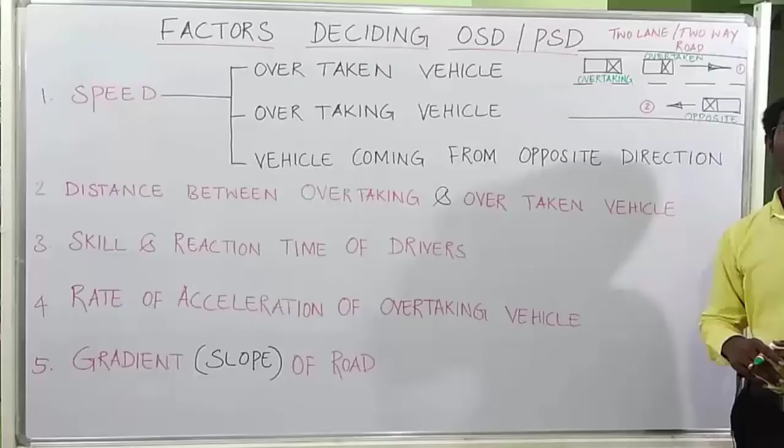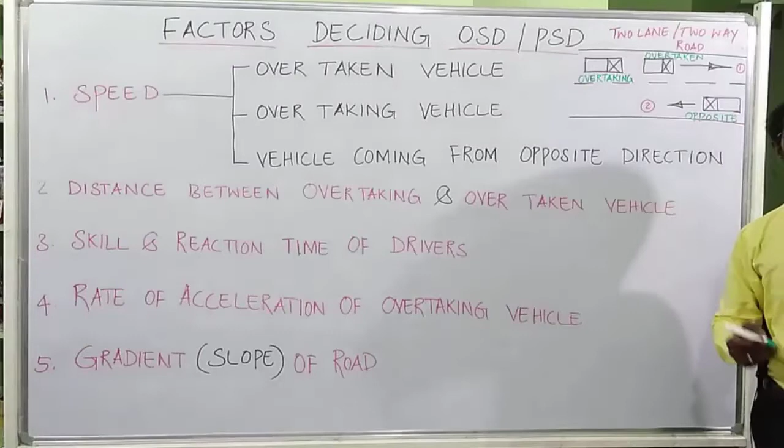Mostly overtaking or passing sight distance will be designed on a two-lane, two-way road. We have already discussed what is two-lane and what is two-way. Two-lane means one lane for one direction, another lane for the other direction. So this is called a two-lane, two-way road. On this road, one vehicle is traveling at uniform speed, and another vehicle is traveling at the design speed. The vehicle traveling at design speed is the overtaking vehicle. The vehicle traveling at uniform speed is called the overtaken vehicle. There is also an opposite direction vehicle.

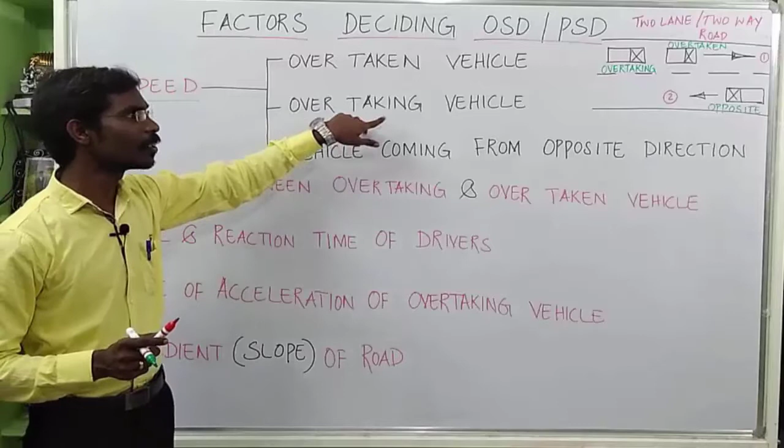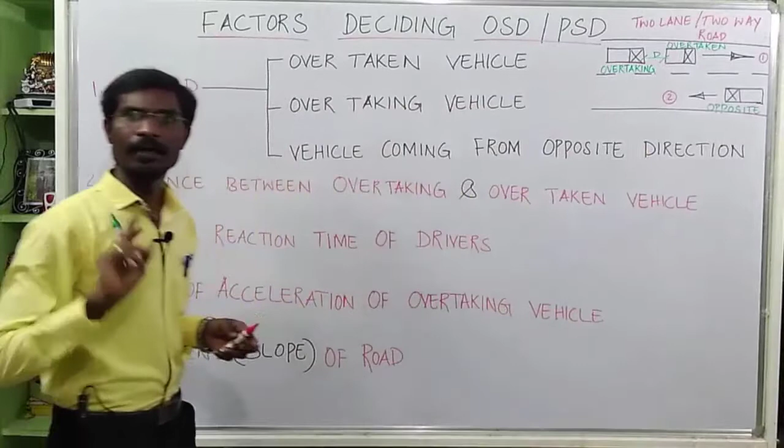The third factor is very important: skill and reaction time of the driver. The reaction time of the driver we discussed in our second video. The skill of the driver is very important because all drivers don't have the same skill. Based on gender, age group or health condition, the skill of the driver may vary, because it is experience. Skill means experience. Reaction time of the driver also varies, because based on experience and perceptiveness, the reaction time may vary from driver to driver.

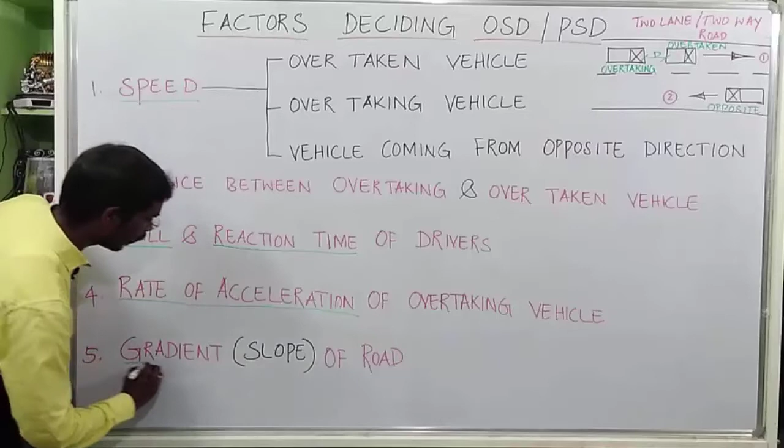The fourth factor is the rate of acceleration of the overtaking vehicle. We need to consider at what rate the overtaking vehicle is going to accelerate. The fifth factor is gradient, or the slope of the road. Based on the condition of the road slope, the overtaking speed may vary.

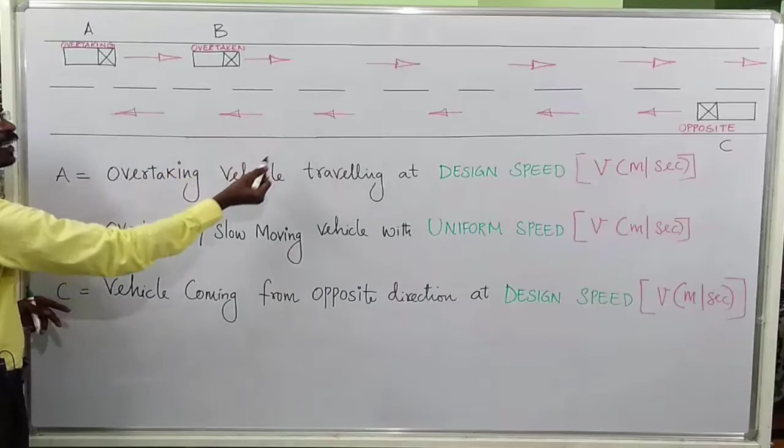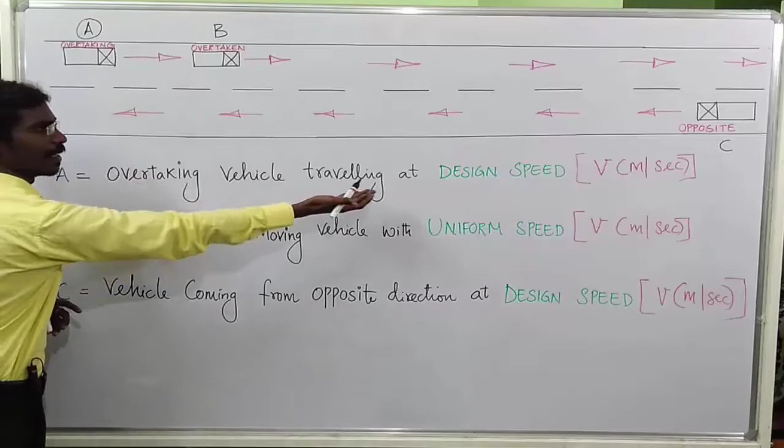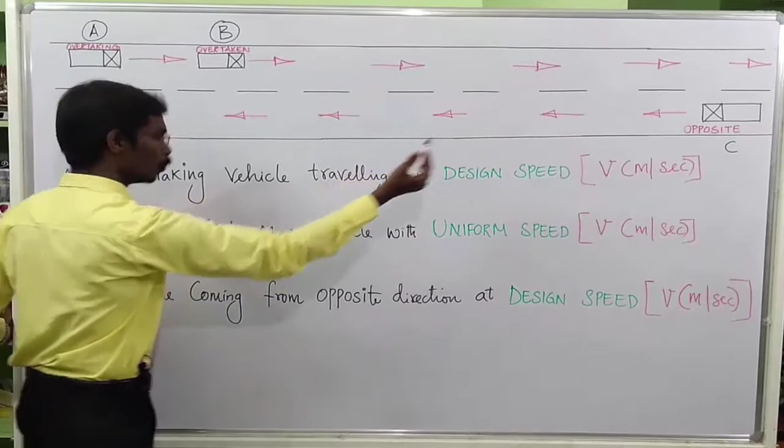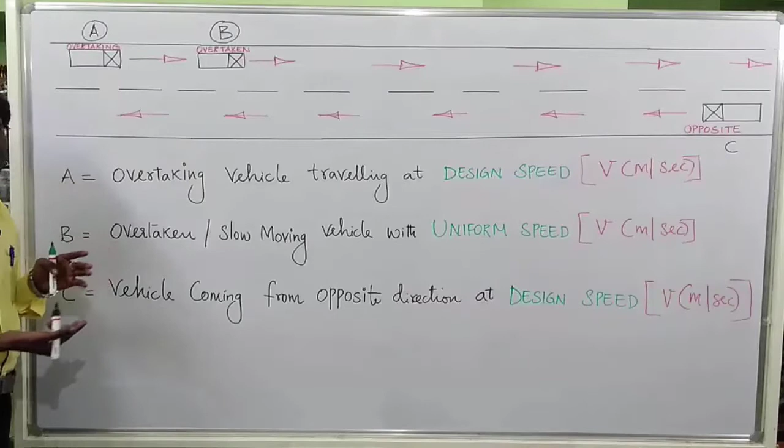This is the actual overtaking sight distance or passing sight distance arrangement on a road. Vehicle A denotes the overtaking vehicle traveling at design speed. Vehicle B denotes the overtaken or slow moving vehicle with uniform speed. Vehicle C denotes the vehicle coming from the opposite direction. These are the three vehicles involved in overtaking sight distance. B is the overtaken or slow moving vehicle, moving slowly with uniform speed. A is the overtaking vehicle moving at design speed, fast compared to the overtaken vehicle

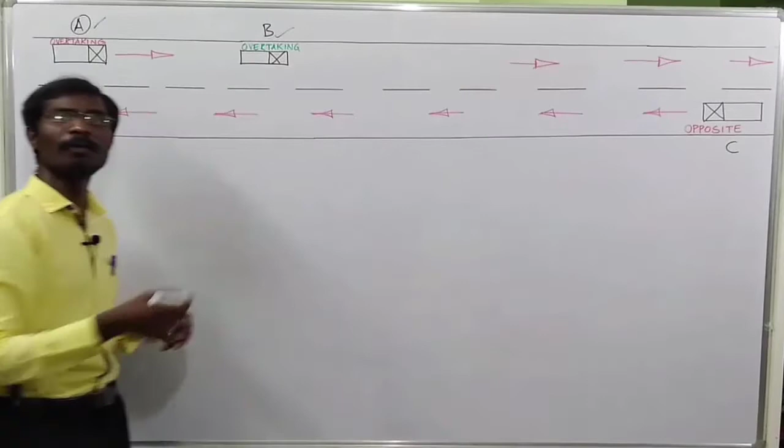or slow moving vehicle. Now the overtaking vehicle driver is thinking to overtake vehicle B. At that time he is thinking about the possibilities of overtaking, whether the distance between the overtaking and overtaken vehicle is available or not, and what is the speed of the opposite vehicle. Like this, he is thinking of many things. This is called the reaction time, which we already discussed in video 2.

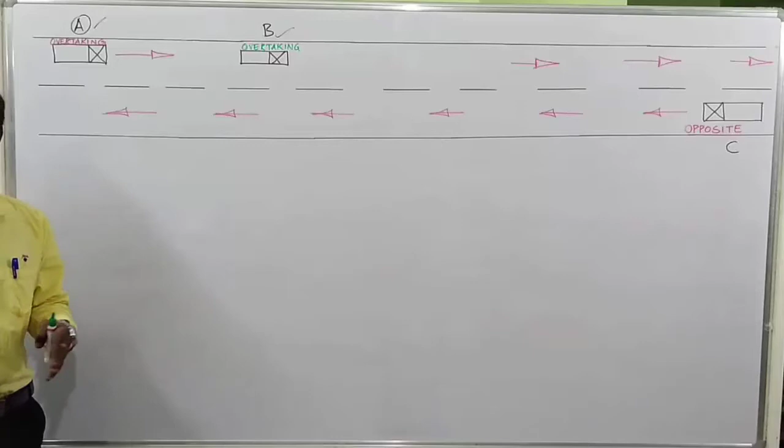The reaction time may be split into 4 parts. One is perception, perceiving the distance or the situation available on the road. The second is intellection: how to overtake, what are the possibilities. Emotion is applying the overtaking action. Volition is the final action of the overtaking. So this is the reaction time of the driver.

During the reaction time of vehicle A, vehicle A may have travelled from this place to some other place. Same like that, during the reaction time of driver A, vehicle B also traveled from this position to some other distance.

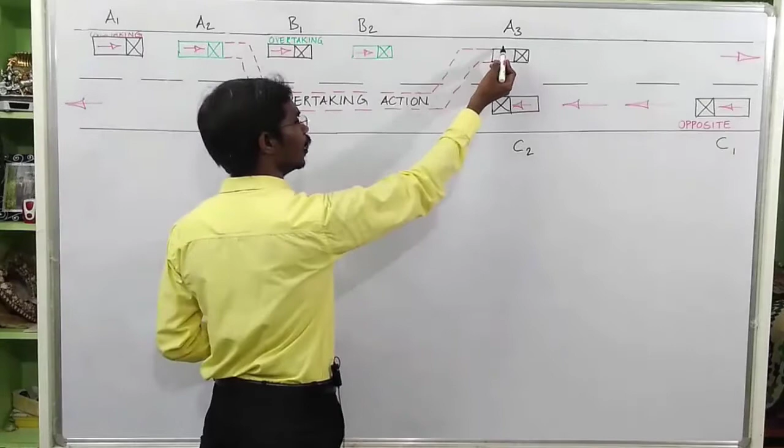During the reaction time of the overtaking vehicle, the vehicle traveled from A1 position to A2 position. Same like that, the overtaken vehicle traveled from B1 position to B2 position. Now the overtaking vehicle traveled from A2 position to A3 position during the actual overtaking time. At the same time, the opposite vehicle traveled from C1 position to C2 position.

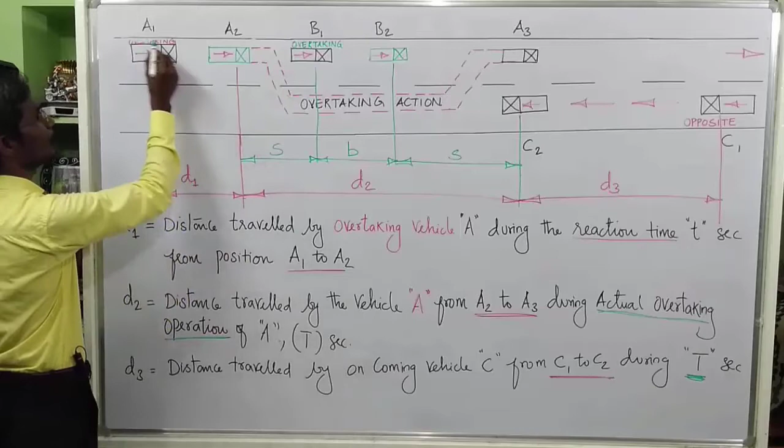Now we can understand what the actual overtaking procedure is. D1 denotes the distance traveled by overtaking vehicle A during the actual reaction time of the driver, that is t seconds, from position A1 to A2. This is called the D1 distance.

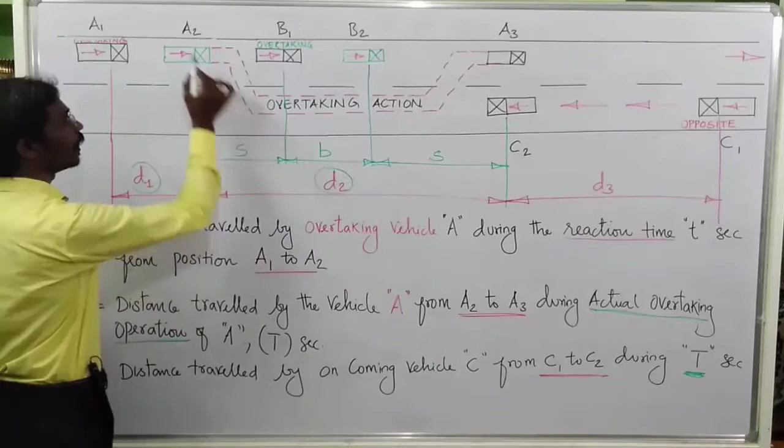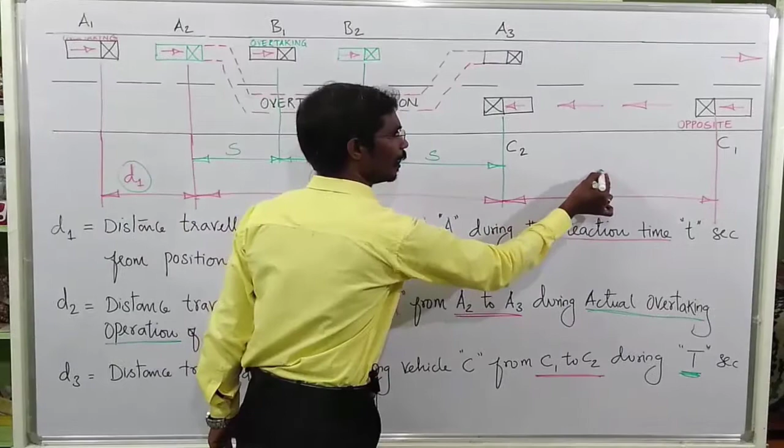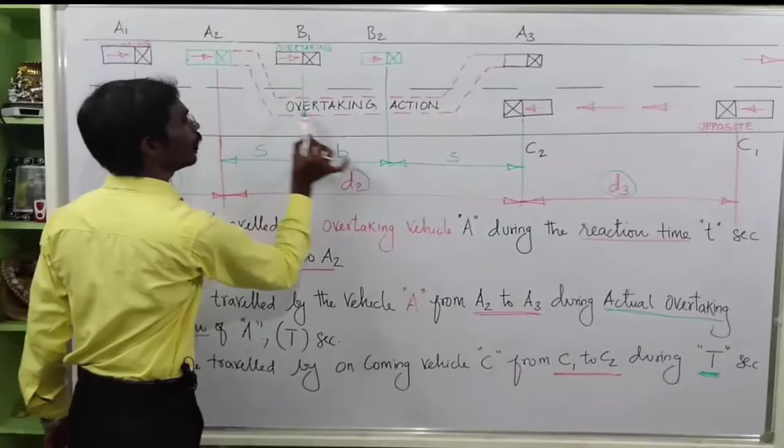The second one, the distance D2, denotes the distance traveled by vehicle A during the actual overtaking time, that is T seconds, from A2 position to A3 position. The third one, D3, denotes the distance traveled by an oncoming vehicle from C1 to C2 position during the actual overtaking operation. Let us discuss the formula to calculate the overtaking sight distance.

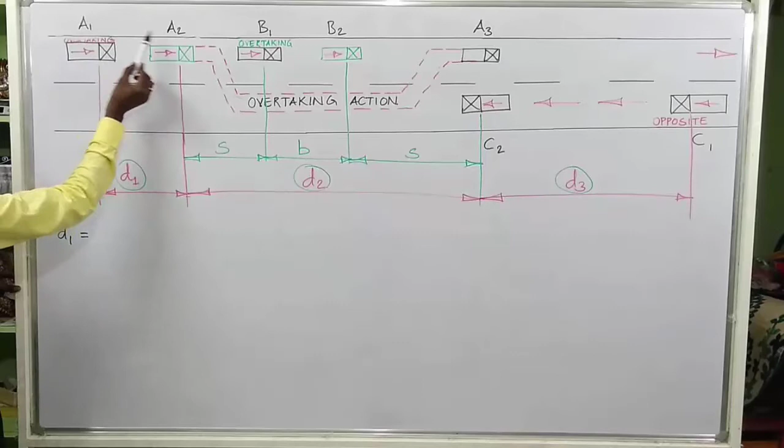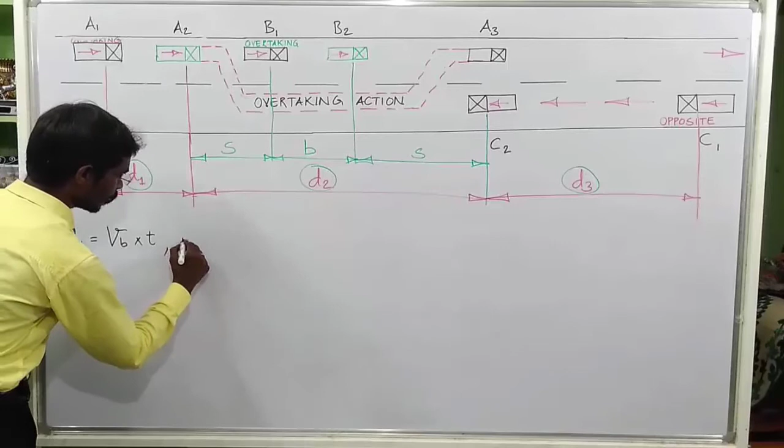First, D1 denotes the distance traveled by the overtaking vehicle during the actual reaction time from A1 to A2 position. So D1 equals vb multiplied by t seconds. vb denotes the velocity of the vehicle. t denotes the reaction time of the driver. The unit is meters because it is a distance. D1, we know, is the distance traveled by the overtaking vehicle from A1 position to A2 position.

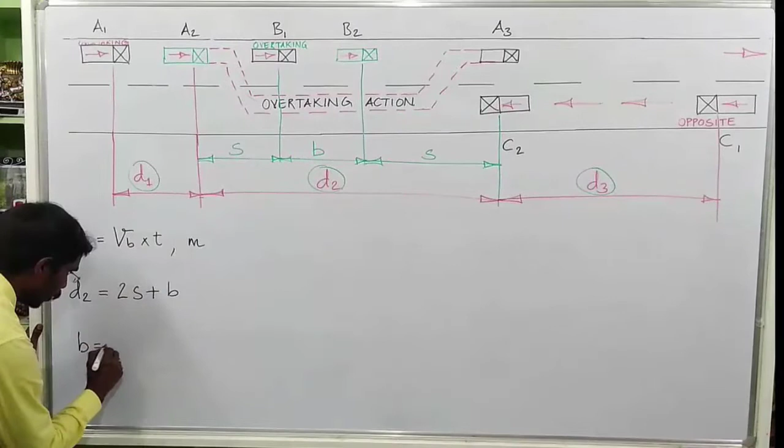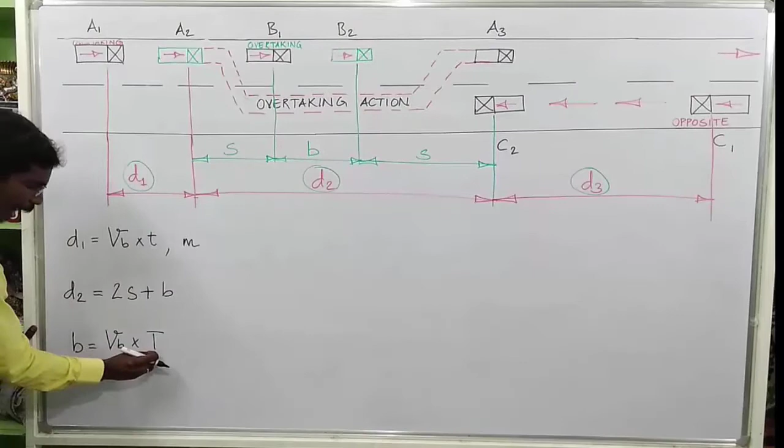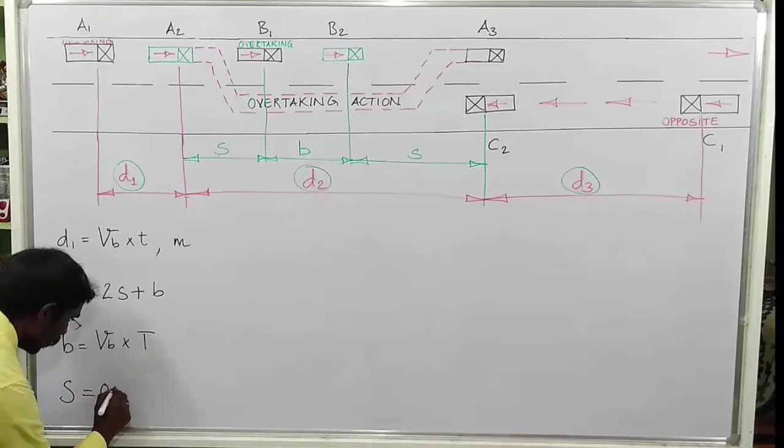Now we can calculate the D2 distance, that is 2 times S plus b, that is 2S plus b. The small b we can calculate: b is equal to small vb into capital T. Again, small vb is the velocity of vehicle B, that is the speed of the vehicle. Capital T denotes the actual overtaking action time. The distance S will be calculated as S equal to 0.7 vb plus 6.

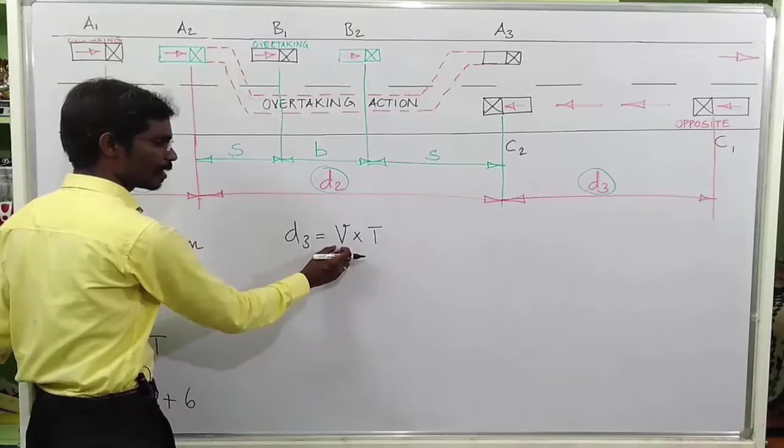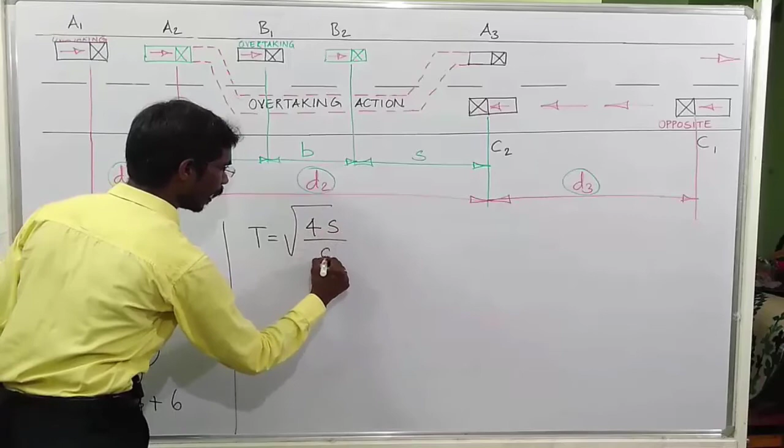The last, D3, can be calculated as D3 equal to V multiplied by capital T. We know V is the design speed, and T is the actual overtaking time. So now calculate capital T, the actual overtaking time. T is equal to the square root of 4 times S divided by A. S we know is the distance here. A means the acceleration of your vehicle.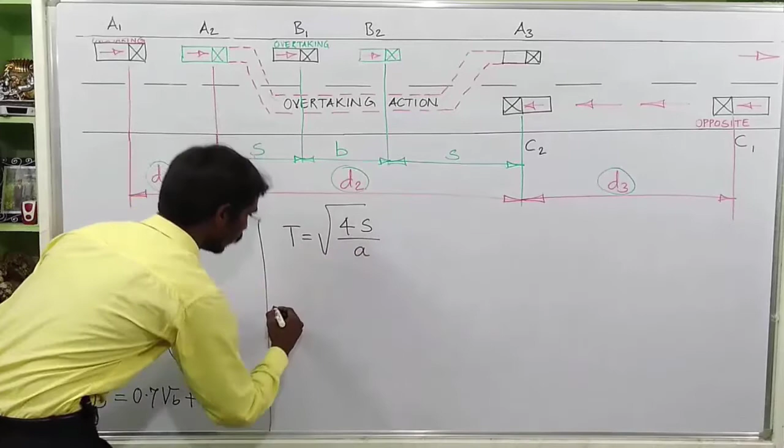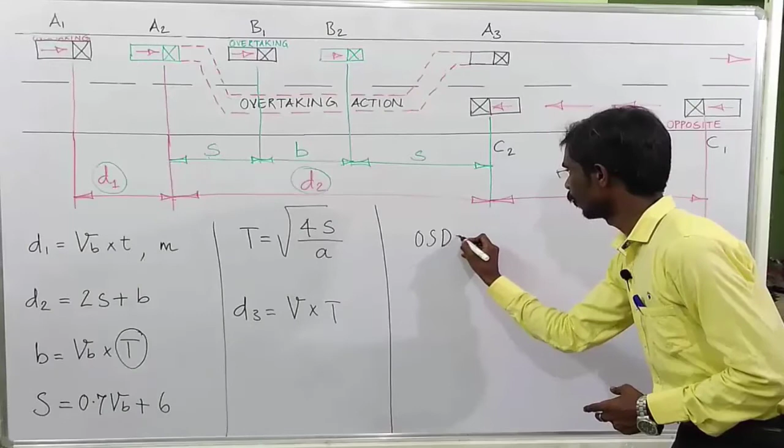Then find D3. D3 equals capital V multiplied by capital T. V denotes the vehicle velocity or vehicle speed. Capital T denotes the overtaking action time. Now we are able to calculate the overtaking sight distance, that is OSD is equal to the summation of D1 plus D2 plus D3. This is called the overtaking sight distance, in meters.

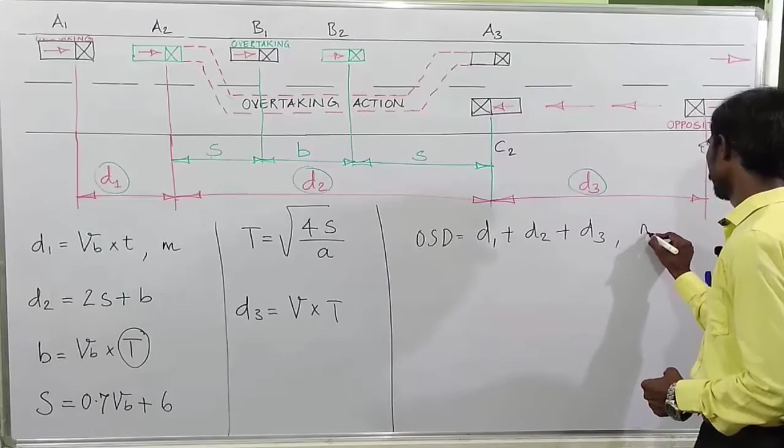After calculating the overtaking sight distance, that is OSD equal to D1 plus D2 plus D3, you can draw the overtaking zone diagram. In this overtaking zone diagram, 3 times OSD is the minimum distance required for the overtaking operation. 5 times OSD is the maximum distance required for the overtaking operation. This zone is called an overtaking zone.

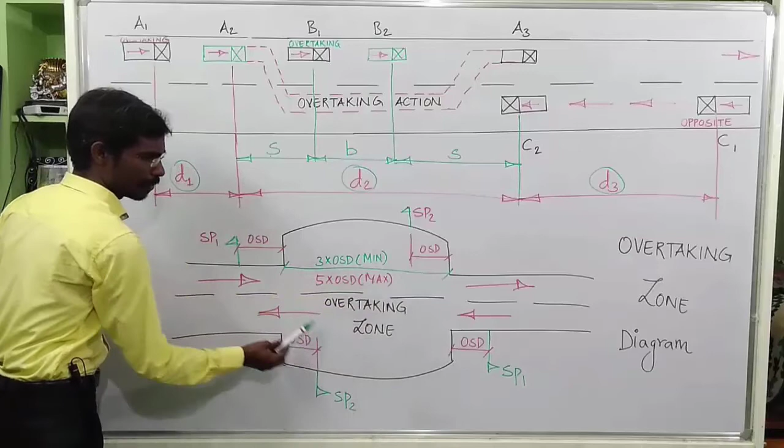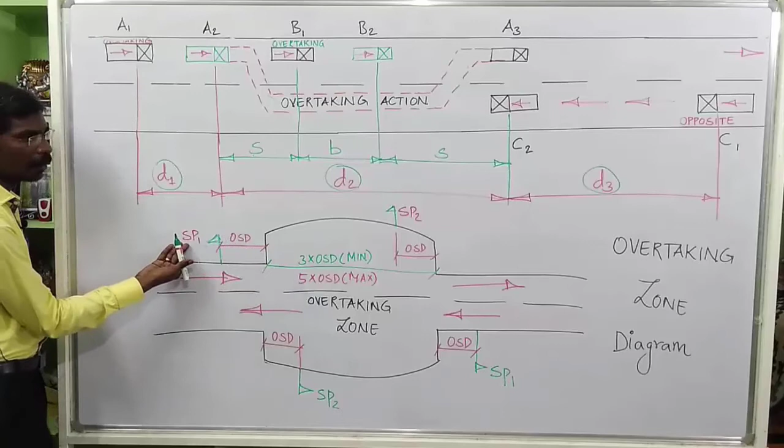Keep one signpost at the distance of OSD. This signpost informs your driver that the overtaking zone is available. Again, keep another signpost, that is signpost 2. You can keep it at the distance of OSD. Signpost 2 will inform your driver that the overtaking zone is going to end.

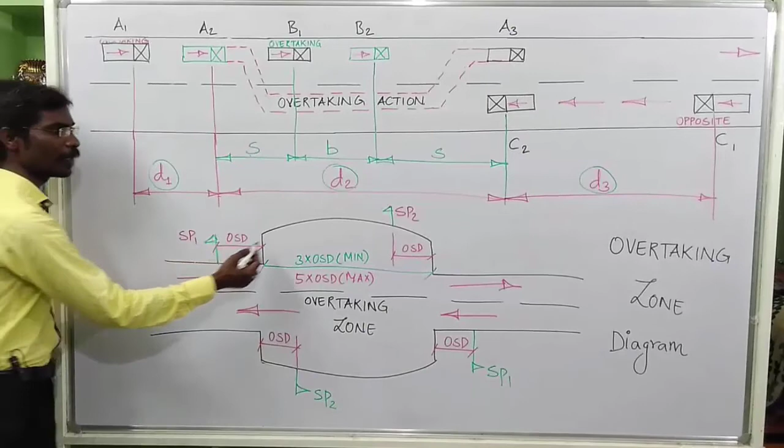Same like that, in the opposite direction, keep one signpost before the entrance of your overtaking zone, and before the end of your overtaking zone, keep another signpost too. It will inform that the overtaking zone is going to end. So this is the arrangement of your overtaking zone diagram.